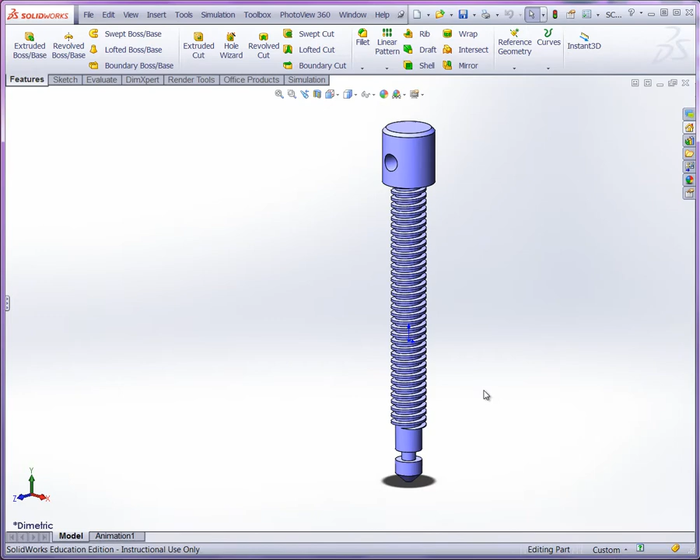Okay, in this video we're going to take a look at the screw. The screw here has the Acme thread modeled onto it, and what we'll be able to do here is create the base solid as a simple revolve, and then we'll come in and cut sweep our thread here. So let's take a look.

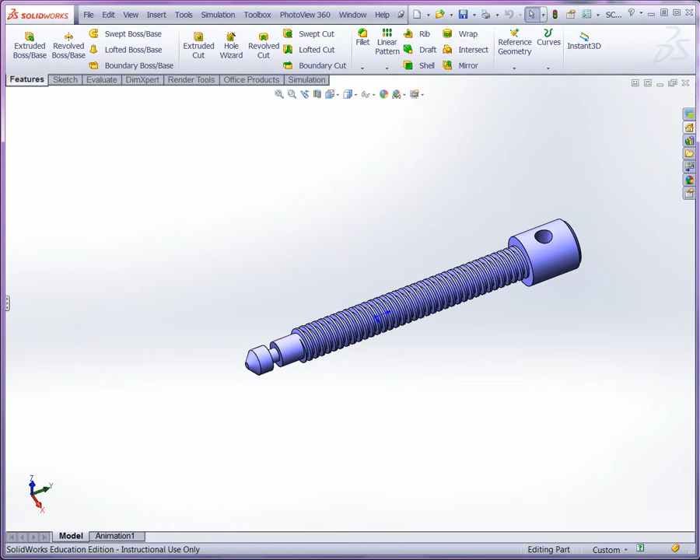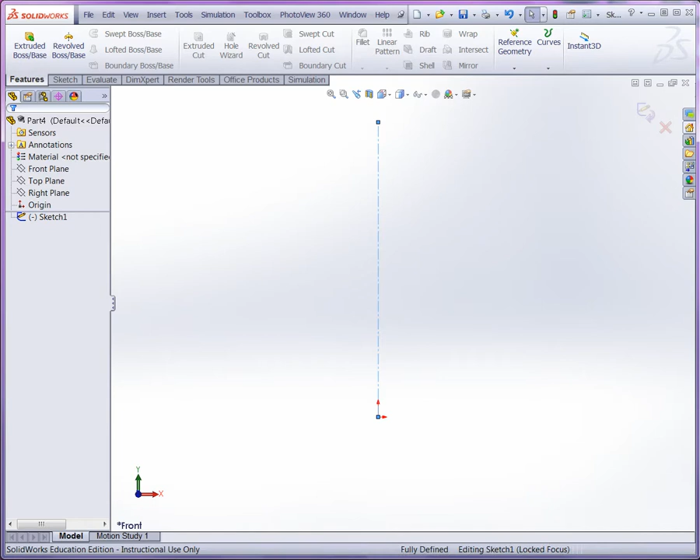Okay, so starting in the front plane, I'll create a new sketch. And again, we'll use the origin as our organizing reference point here. I'll start with a vertical construction line, and now I'll go ahead and sketch out just the base revolve profile. So let's start with a line here, starting at the top. Actually, let's start here at the bottom. I'm going to start here with that angled edge, and don't worry about the dimensions for right now. We'll come back and adjust them.

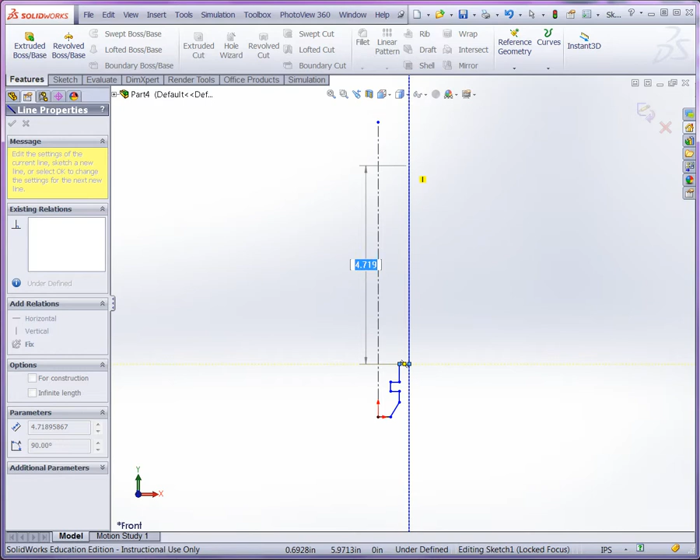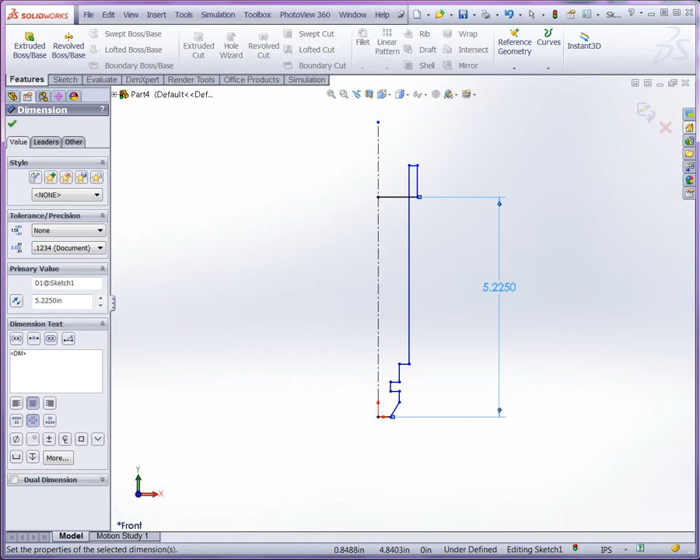And then we'll finish off with the head here, and then add our smart dimensions. So from the very bottom here to the very top, we're going to set that to a distance of 5.225. You can see we can do some adjustments right here. Alright, now from the top here to this edge, we're going to set that to 0.800, and then the full length of what will eventually be the thread, this is going to be 360.

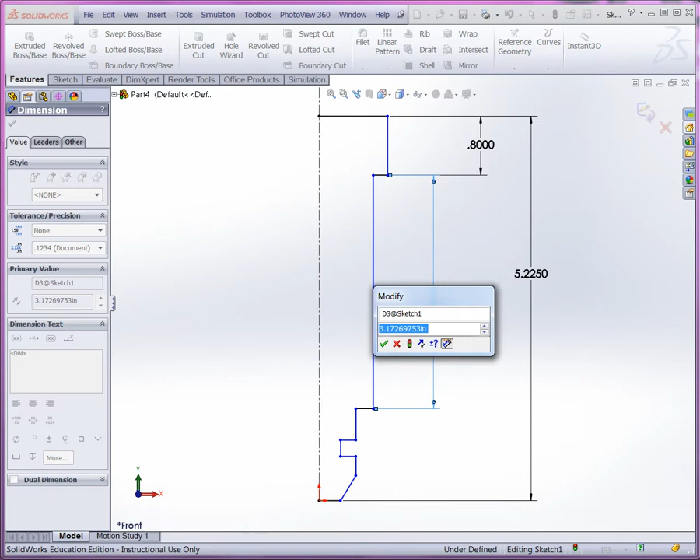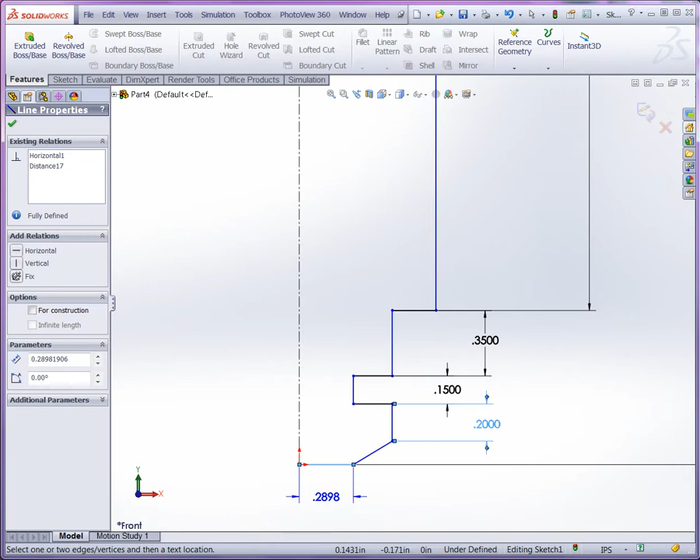And then let's zoom into this detail area here. Okay, so we got a distance of 350 here. And then we've got 150 here. And this is at 0.20. And we're starting with this edge at 0.05. And then this edge to the center here, we're going to use a distance of 0.380 divided by 2.

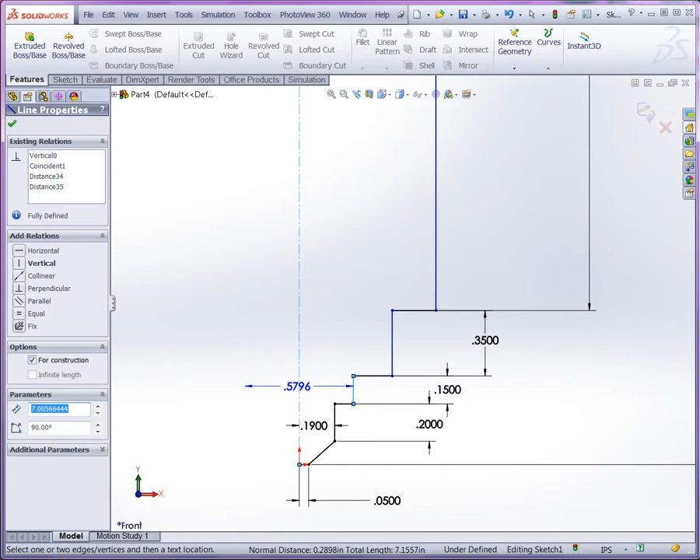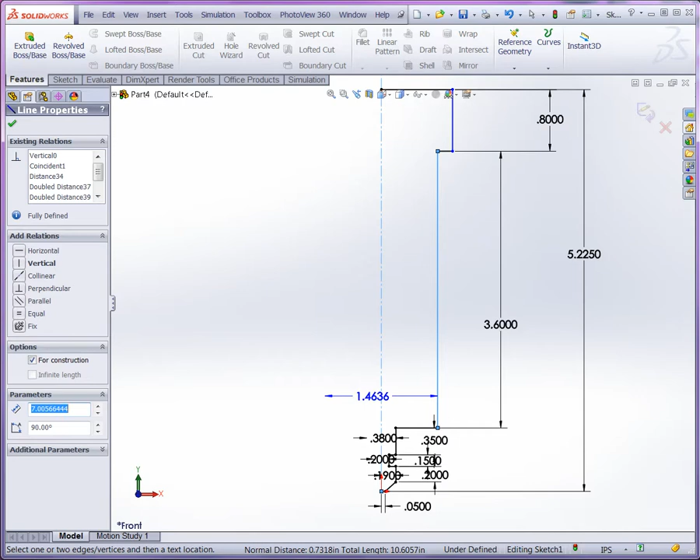This edge here to the center, you can see if we go over our center line there, we could establish the total diameter, and that's going to be at 0.20. And we'll do the same thing here at 0.38. Alright, and as we continue up, the distance from this edge to here will be 0.5. And then from here to the center there, we can have a total of 0.750. So here's our overall profile and detail at the bottom there.

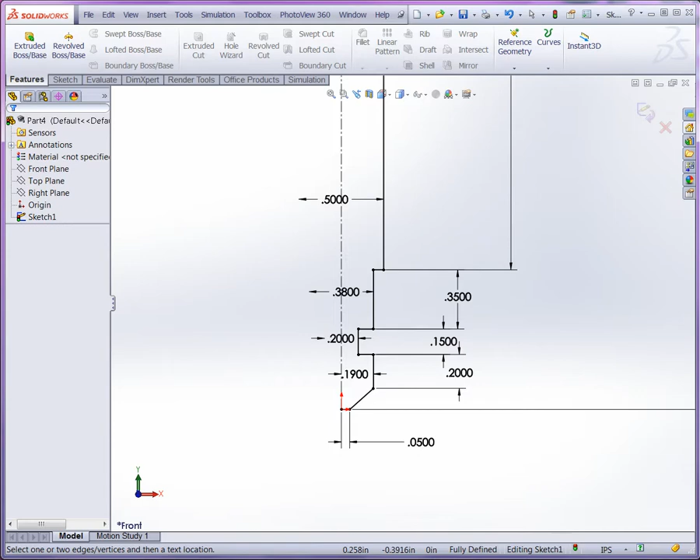Now we're ready to go ahead and revolve it. And it's okay if it's open, because we're going to be just creating a solid and using the construction line there for the revolution axis, okay, for a full 360, and click OK. And then let's go ahead and select the very top edge here so we can create our chamfer, and that's a 0.05 at 45 degrees.

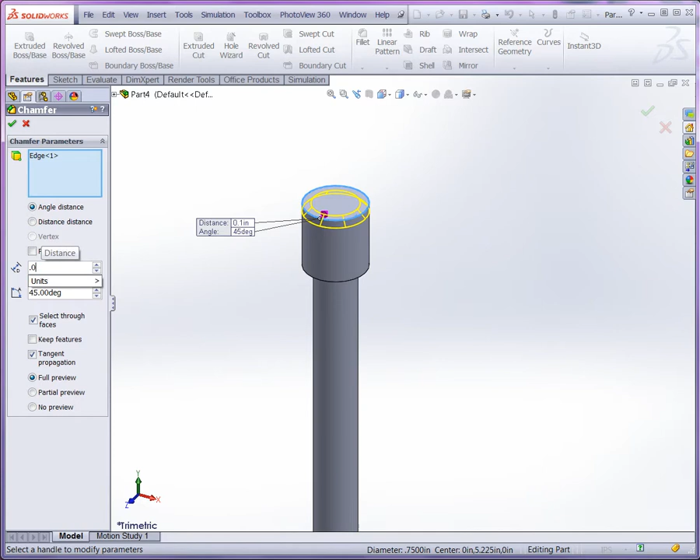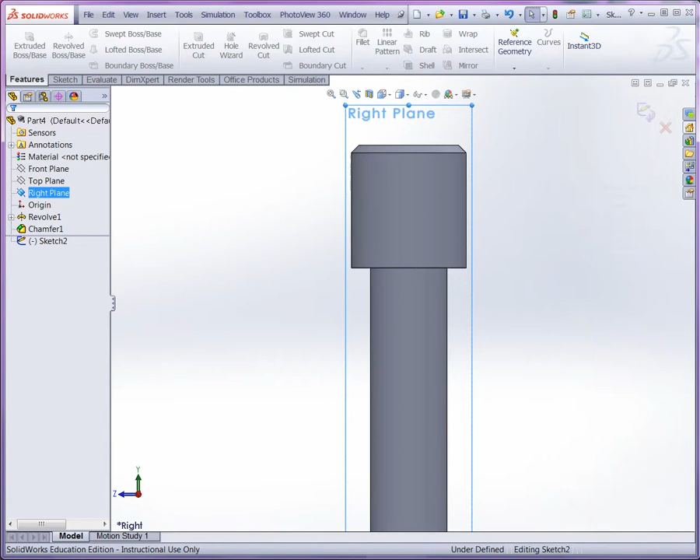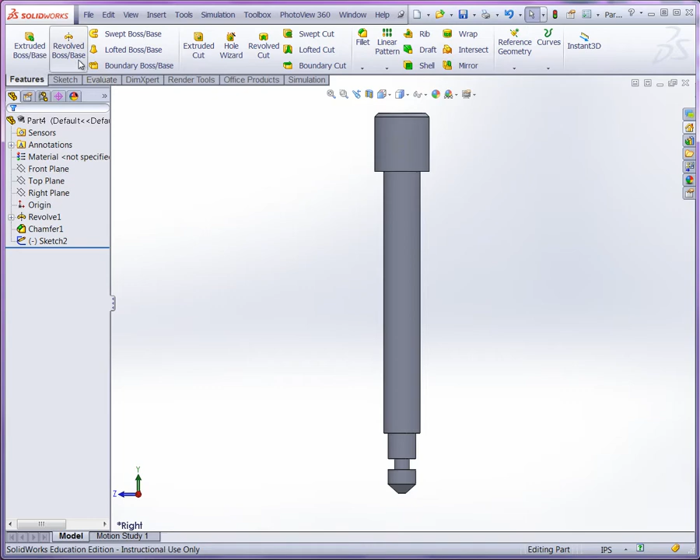Okay, and then we'll use the right plane to create a sketch. And let's get normal to that. You could also do this in the front plane actually. But here we've got a sketch circle along the center there. And we'll set the dimension there at 0.250. Now let's go ahead and use our cut extrude, and we'll use our sketch here to do a mid-plane cut extrude, and make sure you just go through the surface on both sides. Click OK.

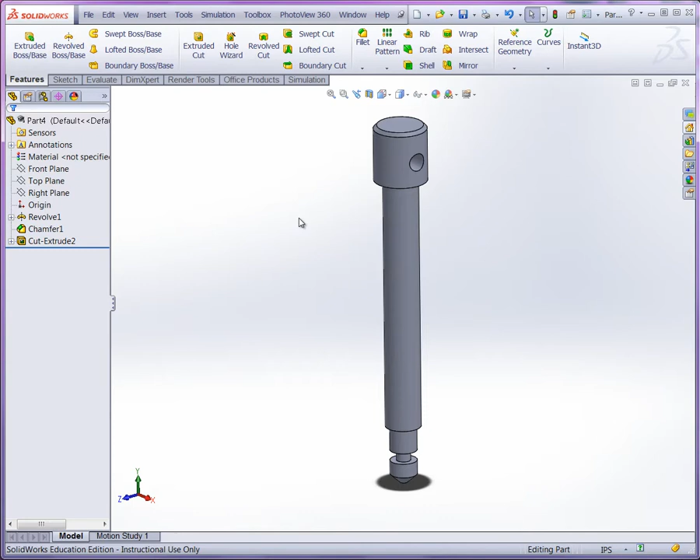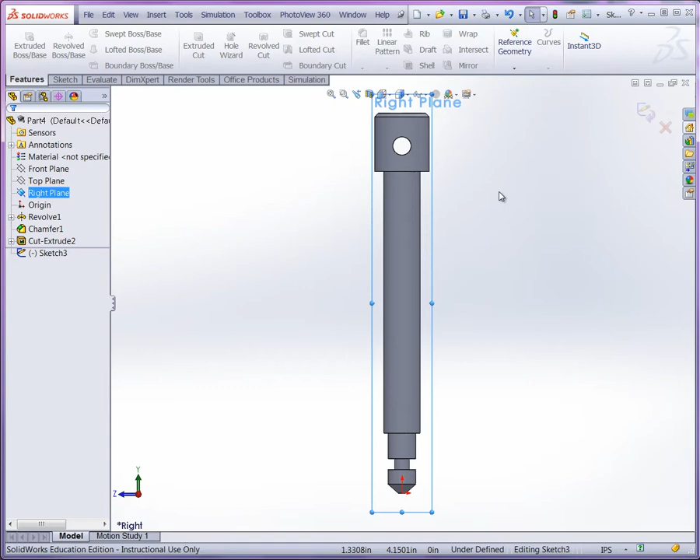And now we're ready to focus our attention on the Acme screw thread. Keep in mind that what we want to do here is, again, create the sketch profile for the thread. We want to create a sketch circle for the helix, create this helix, and then do our cut sweep. So let's continue. Okay, so let's start by getting into the right plane and creating a sketch. I'm going to get normal to this view, and I'll use my Alt key with my arrows to turn this on its side. It's just going to be easier for me to sketch this out.

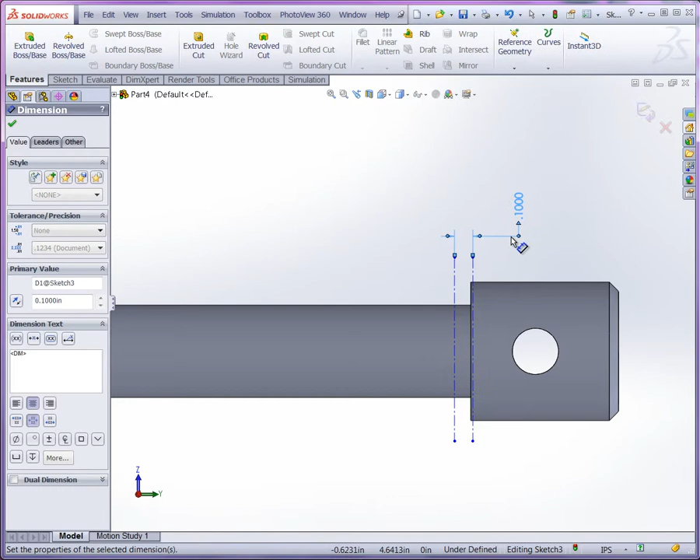Now remember, we're going to have the thread come all the way up to the face here, but we're going to give us a little bit of relief, about equal to the pitch. So we're going to offset our thread profile here by 0.1. So let's start first with a center line here. Okay, and then we'll create another one using the smart dimension 0.1. Okay, first of all, I'm going to undo that and make sure that this center line here and this face are collinear. Okay, now I can change the dimension to 0.10 so that this will be pushed away.

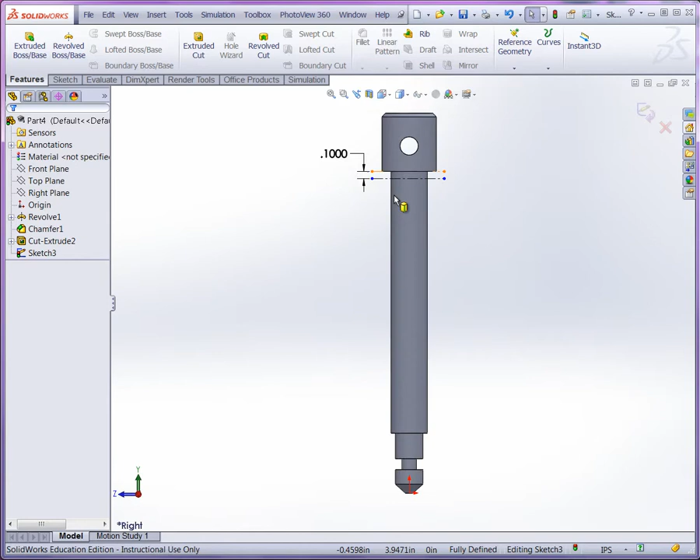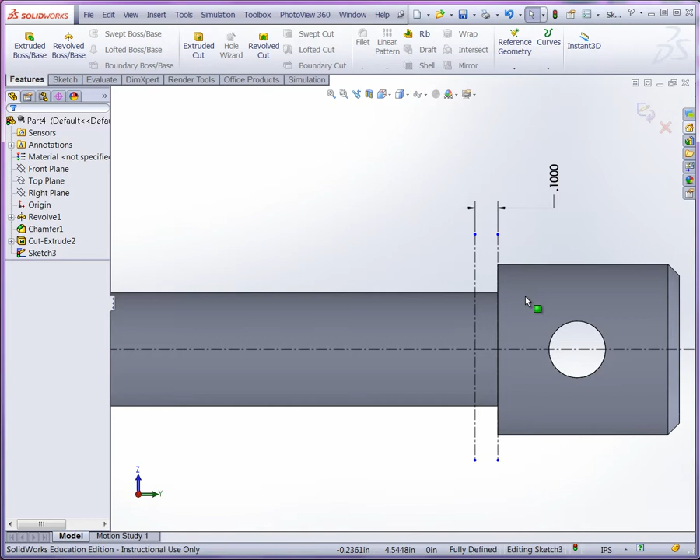Okay, and let's see if we can get normal again. I'll use Alt and my left arrow key here. Alright, and I'll establish a center line from the origin here, which perfectly bisects our cylinder here. Okay, and now we'll go ahead and get ready to sketch our thread profile. Now we're going to do the inverse because we're going to remove to reveal our thread profile. Alright, so let's go ahead and sketch out our thread profile here. Let's go ahead and start with this line here.

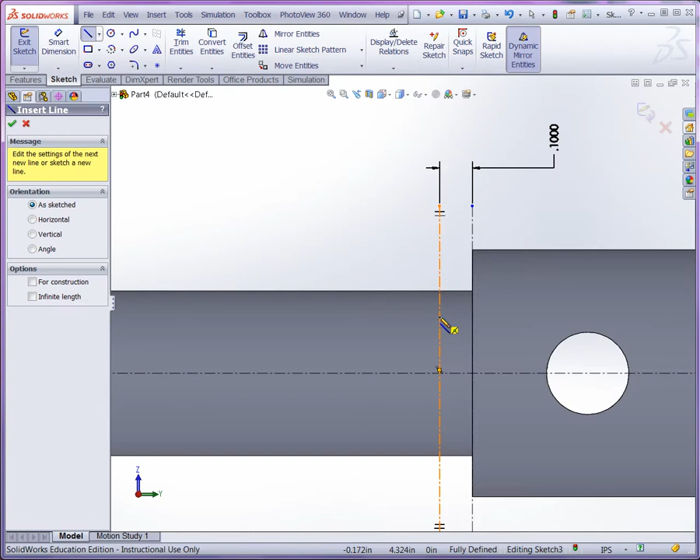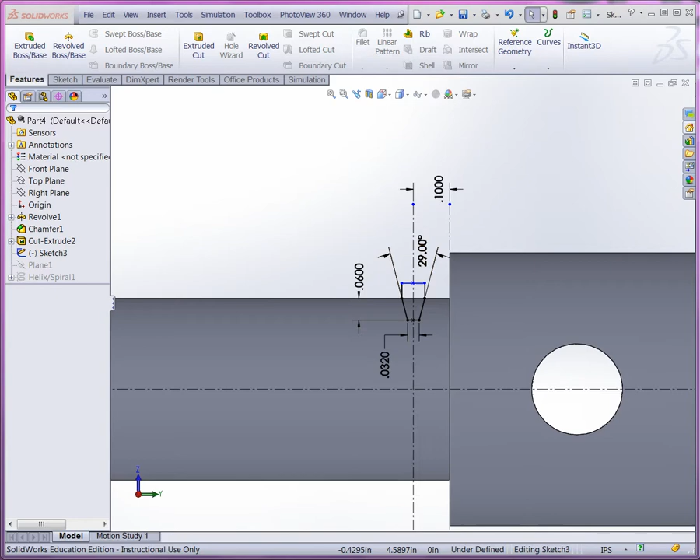Turn on our dynamic mirror, and we're going to sketch out the negative part of our tooth profile here. Let's adjust the thread profile here to show 29 degrees, a 0.032 root, and 0.06 depth for the tooth profile. So closing this sketch, I'm going to select this face, and I'll create a new plane, and I'm going to offset it by 0.1, and I'll use this new plane to create a new sketch, and I'll get normal to that.

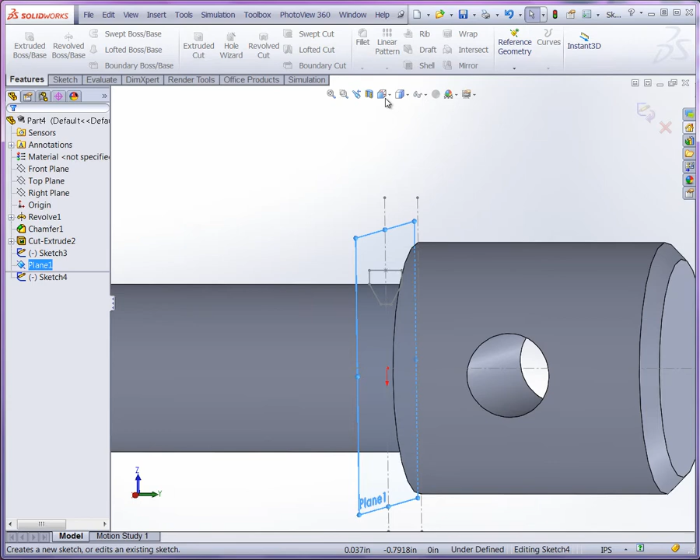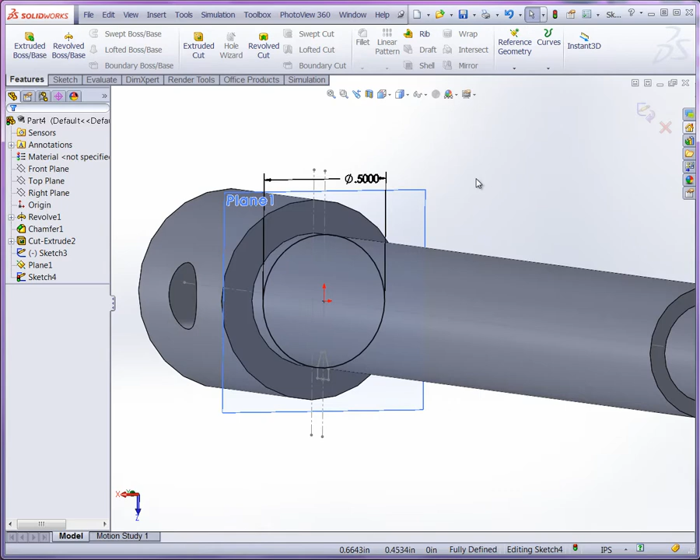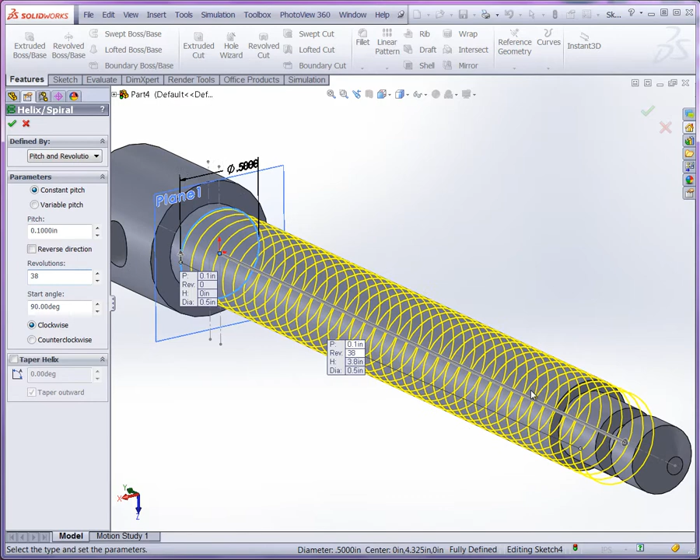And I'll use a circle sketch here, setting the diameter to 0.5. Okay, and we'll use this circle together with our helix spiral. We'll reverse the direction. We have about 38 revolutions to go through the entire large cylinder. Our pitch is 0.10. Set our start angle to 180. There it is. Okay, so we've got our start angle of 180, pitch of 0.1, 38 revolutions.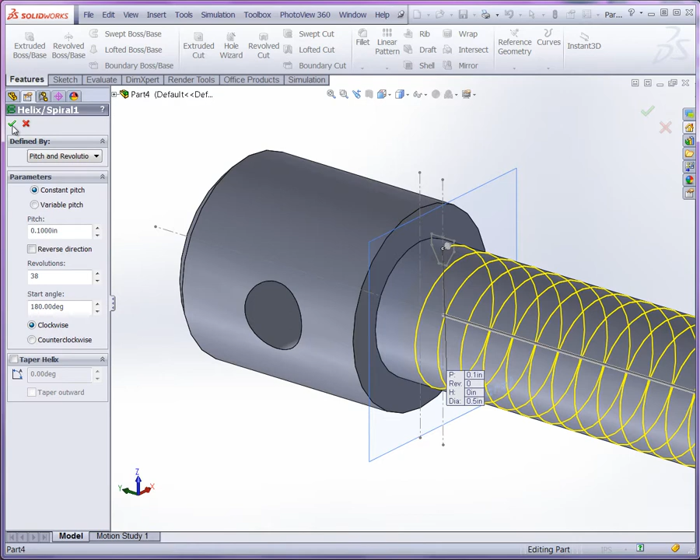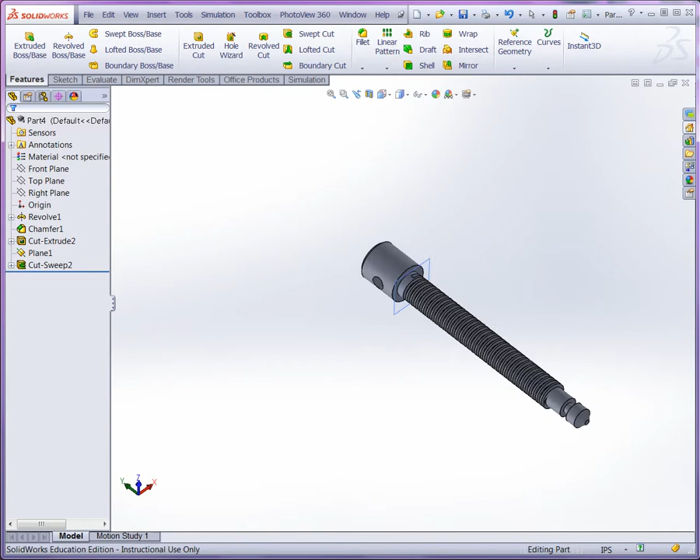Now that we have the helix and we have our profile, let's go ahead and do the sweep cut. Let's select the tooth profile, and then we'll select the helix, and that should produce our final Acme thread. Now you can go ahead and provide some color or add material, and then continue with the technical drawing views.